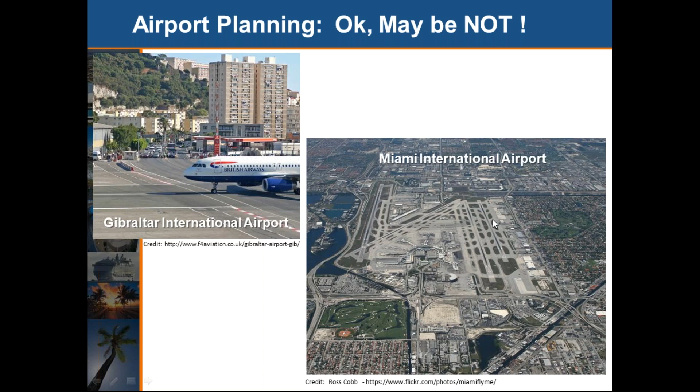So what's different about airport planning? Well, we have lots of extra regulations, including from the Federal Aviation Administration, FAA. You have lots of land use compatibility considerations that relate to noise and noise contours, that relate to airspace and making sure that the airspace is clear. All that can also get into high-rise stuff, also wildlife, particularly flying wildlife, and radio interference, that again can be high-rise and other types of interference, and ground safety issues.

And then now, increasingly, we're getting things like drones and having to worry about spaceports.

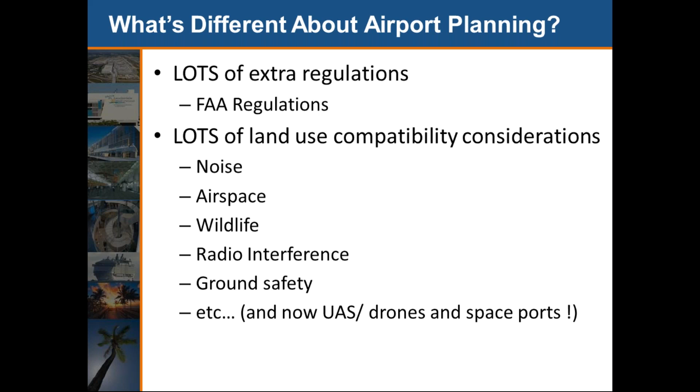In this state, we're having to worry a lot about presidential visits. We've got a General Aviation Airport, public aviation, that gets shut down totally every time the president comes to Mar-a-Lago. There are restrictions on how close airplanes can come to Mar-a-Lago when he's there, and that also affects some of the commercial aviation from Palm Beach International.

Useful resources, because they can help on the exam. There's a report on enhancing airport land use compatibility, a free resource that gets into a lot of compatibility issues. There's a PAS report I will place on the FDP site on airport and land use compatibility, and you can see some of the topics it covers.

How do you develop a strong airport vision? How do you envision potential futures through master planning? Enhancing airport land use compatibility seems to be more what comes up on the exam, along with other things you do environmentally. Airport community planners must work together, understand and consider the needs and concerns of the community, and make use of the airport.

The first big area deals with airport noise regulations. There are some regulations, and there's a PAS report out there from 1992, which you now have access to for free, so you can go look at that.

The Blue Book has about 12 pages of stuff on airport planning, and it covers things like airport land use interface, what is airside development, what is landside development. That sometimes comes up in the exam. We're going to talk about it a little bit, but the Blue Book has some good pages. So, common airport terms.

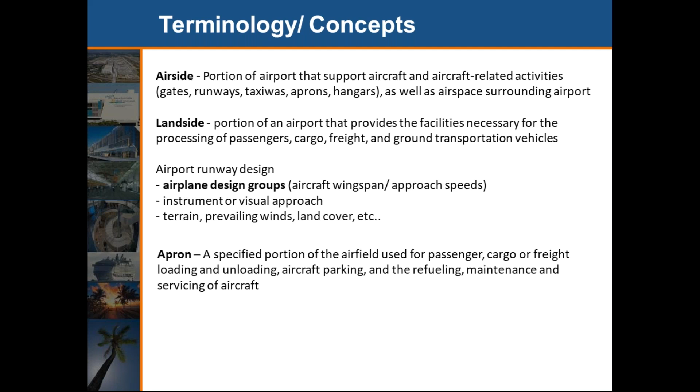Landside is the portion of an airport that provides the facilities necessary for processing of passengers, cargo, freight, and ground transportation vehicles. Apron is a specified portion of the airfield used for passenger, cargo, or freight loading and unloading, aircraft parking, and the refueling, maintenance, and servicing of aircraft.

Regulatory framework: first of all, there's a whole set of Federal Aviation Administration regulations, known as FAR - Federal Aviation Regulations, don't confuse it with floor-area ratio. There are ones that deal with the airspace, deal with noise compatibility, deal with certification of airports, and on and on.

Where do some of the funding sources come from? The obligations: the FAA Airport Improvement Program, money comes from the airport and the Airport Trust Fund, which is funded mainly from excise tax paid by users of the air system. There's an annual formula grant entitlement based upon number of plane passengers and cargo weights, and then there are discretionary funds to fund eligible capital improvement programs.

There are passenger facility charges - local user fees collected by the airport, and part of the airports. Then there's state grants and general airport revenue bonds, secured by airports' future revenue. These are common at large airports.

Passenger enplanements are collected for the full calendar year, and that determines the entitlements for the next fiscal year for the money. To give you some idea, for the current year, Miami had 19 million plane passengers, and Fort Lauderdale was about 11 million.

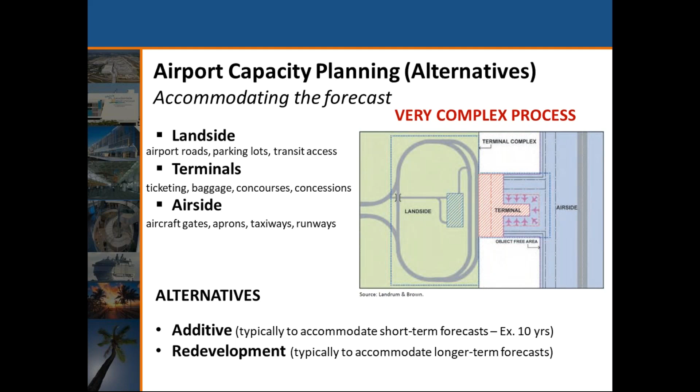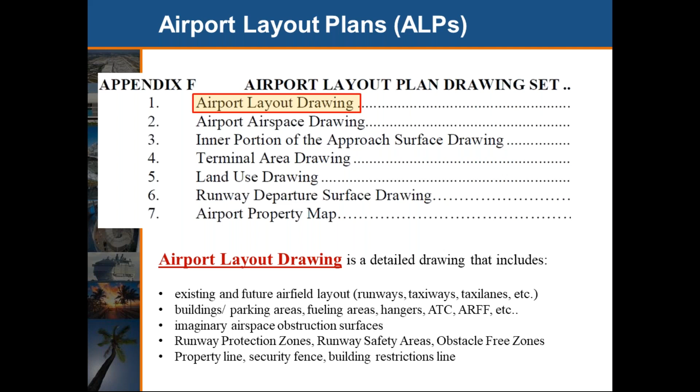So your layout plans are how you're physically going to put your detailed plan that shows your existing and future airfield layout, where your runways are, your taxiways, etc., and where your buildings are, what type of obstruction surfaces you might have to worry about, where are your protection zones, where are your runway safety areas, and your obstacle-free zones, etc. So you have all of that put on a plan.

Let's see. So, safe, efficient preservation of navigable airspace. You look at notification if anything's going to be a hazard to the airspace. Anything located on the airports, regardless of height, would be an issue. Anything that's going to be more than 200 feet above ground.

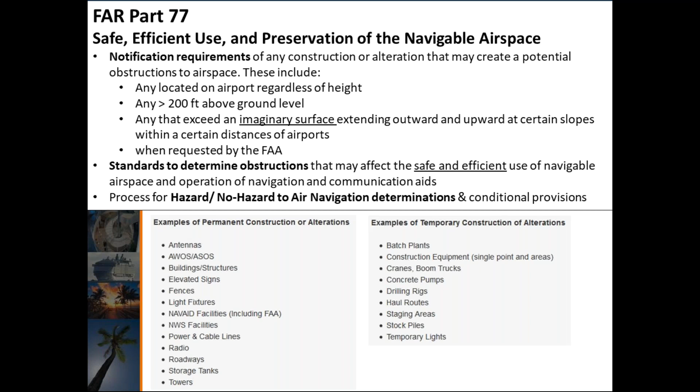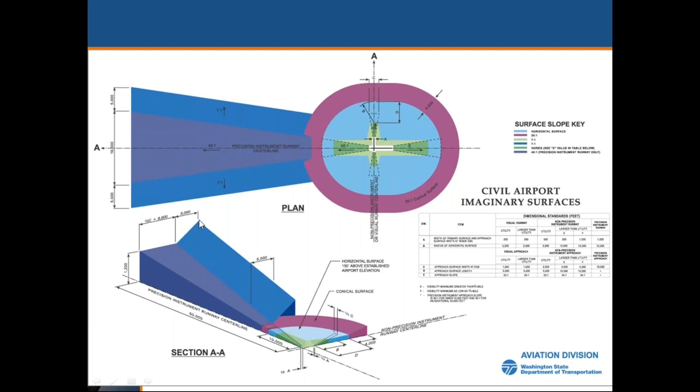Then you project out an imaginary surface extending outward and upward at a certain slope. Anything that's going to be within inside that envelope is an issue. And so you get into everything, fences and sometimes drilling rigs and all sorts of things. So that's what they look like. You can see where their envelope is going off down here out, and they're planning anything, look at whether anything's going to be involved in that area.

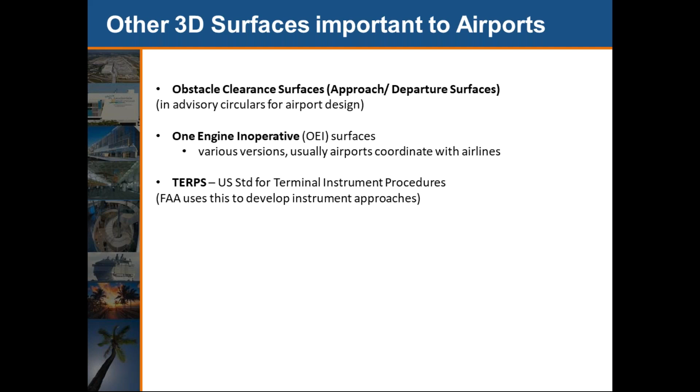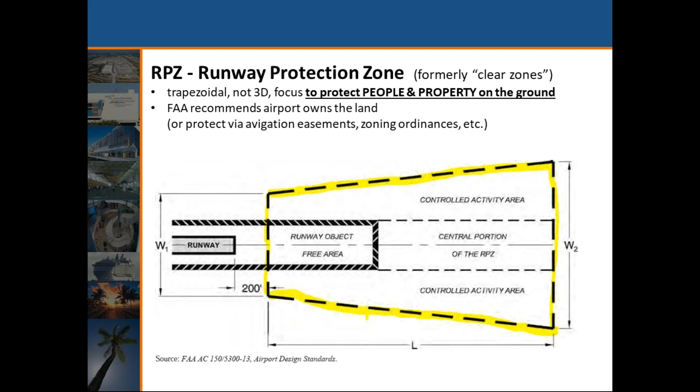So you're looking on a 3D level, trying to look at obstacle clearance areas and what happens if you get one engine inoperative, where it's going to have to emergency land, etc. Ground safety, because accidents happen. So you have your runway protection zone. It used to be called clear zones. These are, you're trying to protect people and property on the ground.

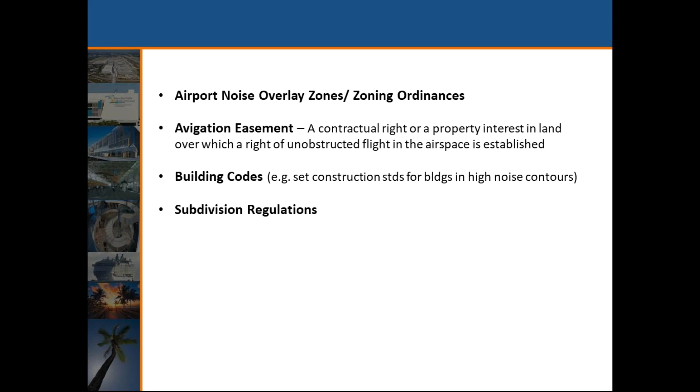All right, so trying to use planning tools, airport noise overlay zones. Avigation easement is a contractual right or a property interest in land over which a right of unobstructed flight is established. That's an avigation easement. And then you get into height and land use zoning, as we talked about.

Noise compatibility, okay, this sometimes has come up on the exam. Decibel is a scale from the threshold of human hearing, around 0 decibels, upwards towards the threshold of pain, which is about 120 to 140 decibels. Think about a loud rock concert.

Decibel A, the A-weighted decibel, is used for measuring environmental sound levels. Then you do different types of day-night noise levels over a 24-hour period, and they may have slightly different noise levels allowed. But between 10 p.m. and 7 a.m. at night, you're penalized 10 decibels, because there's higher human sensitivity at night to sleep disturbance. So you look at your day-night level contour, and basically what you're looking for is to define significant noise exposure as any area that's within a 65 decibel DNL contour.

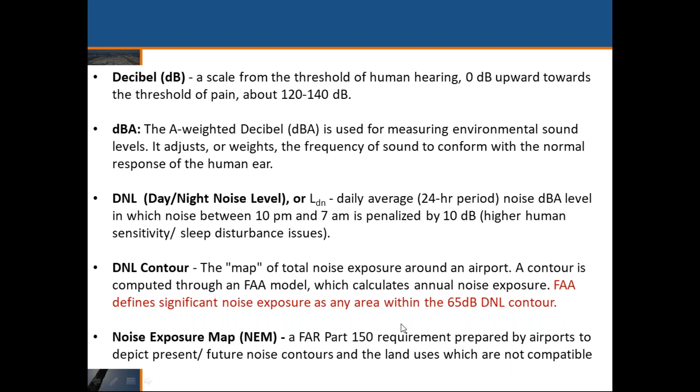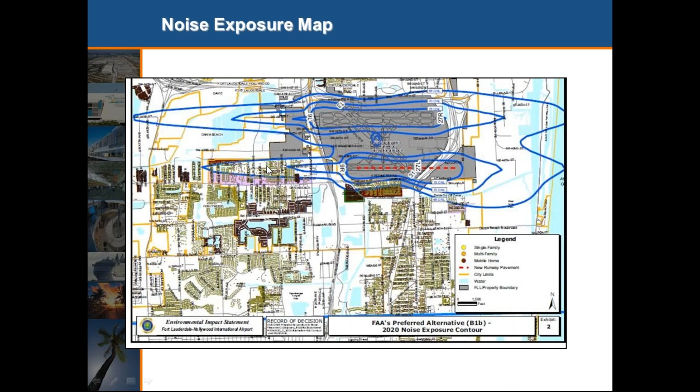That's the basic contour, remember that, 65 dB. And then so what you do is you draw them out. You see what's going to be affected and what type of land use is involved in there, and then you have to try to deal with mitigation of that. So for residential, things like that, you want basically below 65 dB. Certain other types of uses can withstand a little higher, like office, can go up to maybe 70. And some uses like mining or fishing may be able to go up even as high as over 85.

Basically, where the community determines that residential or school uses must be allowed inside the zone, measures to achieve outdoor-to-indoor noise level reductions of at least 25 dB or 30 dB should be incorporated into the building codes.

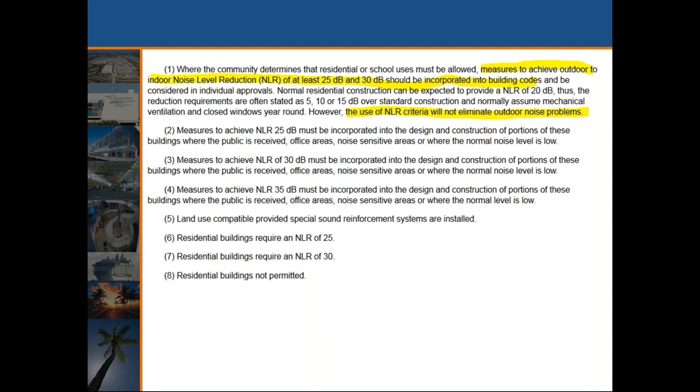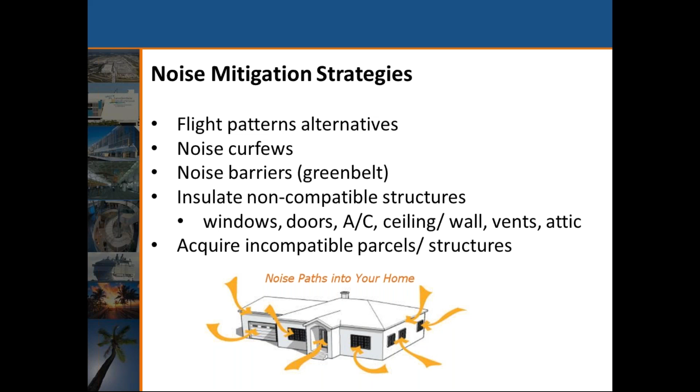Noise mitigation strategies: you may change flight patterns, which is what Trump wanted Palm Beach International to do because of where Mar-a-Lago is. You may get curfews limiting noise at certain times, restricting flights. You may use barriers like green belts, or insulate non-compatible structures' windows and doors. Or you may just outright buy them.

That's the first set on airport planning. I've got to get back to where I was here. All right, another one I want to show a little bit.

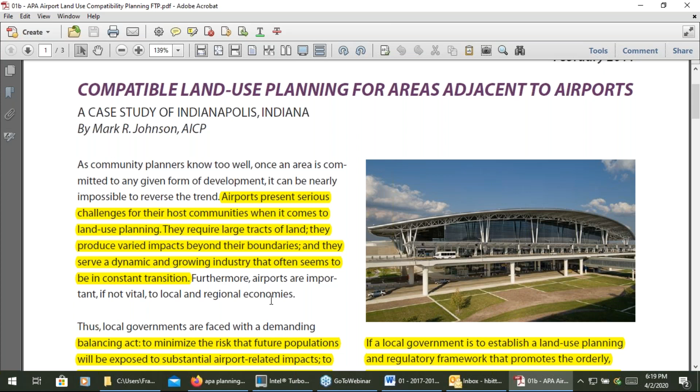There's a balancing act that governments must do to minimize the risk that future populations will be exposed to airport-related impacts, but you also have to protect the long-term viability of the airport by ensuring that existing development does not choke its long-term development needs, and ensure that urban development permitted in the airport area provides fair opportunities for property owners while producing lasting value to the community.

An especially difficult aspect of that interface relates to future airport facility requirements. Things like constructing a new runway or relocating an airport terminal can require substantial land acquisition, rerouting of major highways and arterial streets, and introducing airport noise to new parts of the community. But the inability to provide needed facilities, if you don't allow them, can seriously compromise the airport's ability to accommodate travel demand.

If a local government is to establish a land use plan and regulatory framework that promotes the orderly long-term development of the airport, it must have a long-term master plan that defines the broad outlines of the ultimate airport development. I think that's about all, just a few more points.

Four factors to be successful: you need a consistent management approach and consistent support of the airport authority's board of directors throughout the period when they're undertaking planning and any expansions.

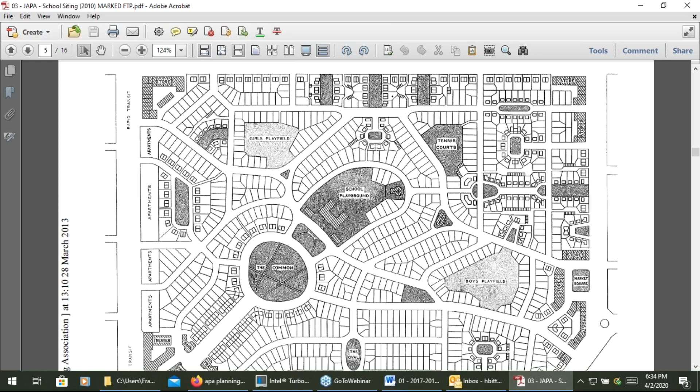Obviously, Clarence Perry's model of the neighborhood affects many other areas - we've come across it many times. Here it is: they have the school playground area in the middle, major arterial streets on the outside, more curvilinear streets on the side. Density is around 10 units per acre, about 160 acres, and we'll get into populations. That's just the schematic of a neighborhood unit.

Another thing I want to do is get into travel a little bit. This is for elementary schools - what's the walking distance? Typical walking distance, these are the ones I really want you to remember: about 1/2 mile for elementary school, about 3/4 mile for a middle school, and about 1 mile for a high school. They can go a little higher, some up to 2 miles. They also have walking and driving time and distance here, but these distances are more what I want you to remember.

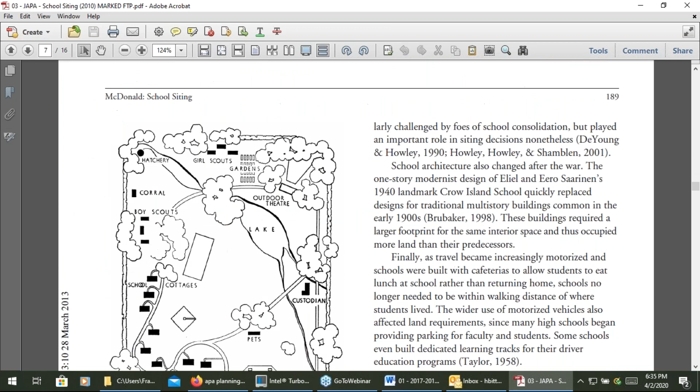That may be the majority of what I want you to pick up from this. But this is a whole discussion about school siting. Now, just to remind you about the neighborhood unit: designed by Perry to act as a framework for urban planners to design functional, self-contained, desirable neighborhoods in the early 20th century in industrializing cities. Perry's concept was that neighborhoods at the time were like islands locked amidst the burgeoning sea of vehicular travel - a dangerous obstacle which prevented children and adults from safely walking nearby. So he published this in the 1929 Regional Plan of New York and its Environs, which led to its promotion as a planning tool.

The principles were: here's that same basic picture again. Center the school in the neighborhood so the children's walk to school was only about 1/4 mile to no more than 1/2 mile, and could be achieved without crossing major arterial streets - so all the arterials are on the outside. It was big enough to support a school, between 5,000 and 9,000 residents. That issue has come up - how big a population do you need to support an elementary school? Probably between 5,000 and 9,000.

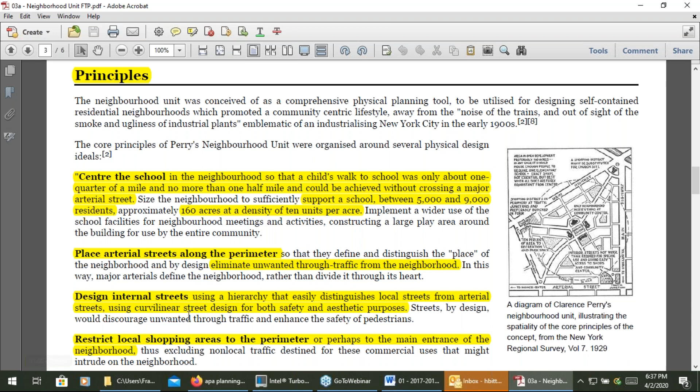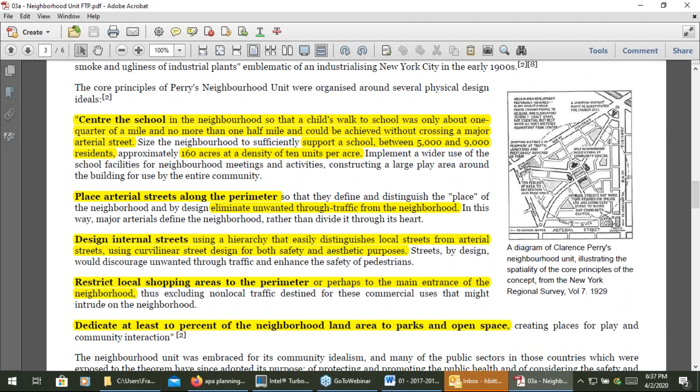160 acres has a density of 10 units per acre. Place arterial streets along the perimeter, the outside here. Eliminate unwanted through traffic by having curvilinear streets, smaller streets, things like that. Design internal streets using a hierarchy that easily distinguishes local streets from arterials, using curvilinear street design for both safety and aesthetics. Restrict shopping to the perimeter, out on the arterials, or perhaps the main entrance of the neighborhood, and dedicate at least 10% of neighborhood land to parks and open space - so some of these areas would be parks and open space here. That's the neighborhood unit concept.

I can almost guarantee you that some aspect of this neighborhood unit concept will come up on the exam. I'll just highlight this one also - again, he published it in the New York Regional Survey, Volume 7, 1929. That used to come up - I don't think it will anymore, but it's associated with Clarence Perry, and it's a connection to school planning. All right.

Next area we want to talk about a little bit.

Library planning. Remember some of the questions were things like the first step of library planning.

Well, just like in a lot of planning, conduct a self-assessment. Conduct a library planning self-assessment. Use results to begin planning the elements of the plan that need development or revision. And this goes through the rest of the steps. You can look through them so you know what the steps are, but they've been asking about the first one most of the time. Just to give you a couple other sources here.

What is a plan? You're going to look critically at what the library does now. By assessing the current situation, the obvious needs and direction can be identified. You have an assessment of the community needs, first responsibility to address the needs of the community. So you're going to do that. That's sort of your steps.

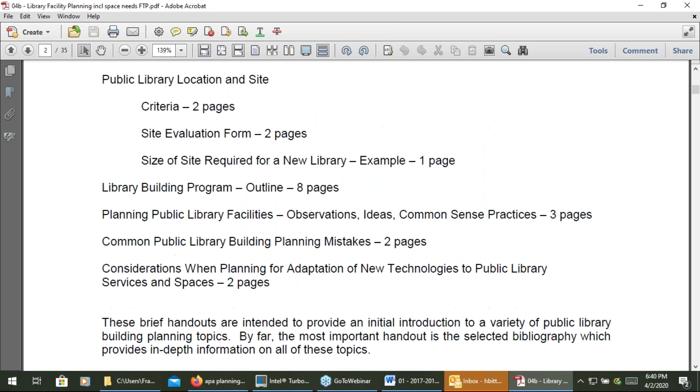Here's another source. Looks at, after he gets through all the references. Did I pass it? Yes, I passed it.

Sorry, skipped over. Basic steps in a library building project. It takes about 3 to 4 years to complete once the planning begins. So they do things like getting it initiated, getting a committee going, selecting a consulting librarian to deal with this. And by the way, typically they get a consulting librarian that knows about building new libraries or expanding it, because that's a form of art that more librarians know about than planners do. So within the library field, they actually have people specializing in new library construction, so they pull them in.

So one of the first things they do is complete the library space needs assessment. And then they go on to do other stuff. Sometimes it's getting their goals, but they look and do their assessment first. And it's just more discussion about how you go through that process.

All right. Told you about trip generation, it may come up on the exam for libraries, which most of you probably never looked at, except when I picked it up the other day. So for a library, per 1,000 square feet of space, it's a trip generation of about 56.24. Now, if they were to ask you here, what's the dependent variable and what's the independent variable, what answer would you have?

What would be what? What would be the independent variable? What's square feet? Square feet. Square footage would be the independent variable. So the dependent variable would be the number of trips per 1,000 square feet.

I don't know what the question is going to be exactly, but they've been asking something about that. And I did get one indication sort of that it may be tied to knowing what the dependent variable was in the rate. I don't know if they give you the numbers or they ask you to remember that it's about 56.

You can see it's lower than a daycare, but it's a lot higher than a lot of other uses per 1,000 square feet. For instance, let's see where we have, do we have office here? Yes, we have office down here. So for instance, it's higher than most office except for a governmental office building.

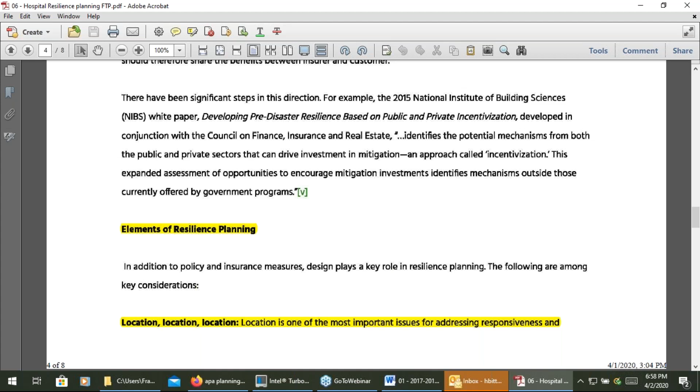In the built environment, resilience relates to how facilities are able to recover. The hospitals and clinics are an important part of the strength of communities. So how do we deal with this? The elements of resilience planning, and the thing they say is most important is location, location, location—one of the most important issues for addressing responsiveness and reliability.

For example, a hospital should be intelligently placed in a highly accessible area serviced by a broad range of transportation. They should be away from potential natural hazards that would leave them vulnerable to critical failure when they're needed most—such areas include swamps and flood zones. So stay out of the high hazard zones, not in the velocity zones along the coast, up high enough that you're out of the 100-year floodplain—maybe even in the 500-year floodplain.

So the first thing to do is not even locate them in places where they're going to be affected. Then you get into other issues about design of facilities—dealing with transportation going there, utilities, having backups, and all the other things. But the first thing is don't put them in harm's way, in an area that's had repeated hits or is likely to be impacted again.

Now, you can't conceive of everything, but you can plan for normal, typical natural disasters like sea level rise, hurricanes, flooding, and maybe even fire. You may not be able to plan for a tornado in terms of location, but you may be able to make it structurally sound enough to deal with that, have its own independent power supply, and other needed aspects. Okay.

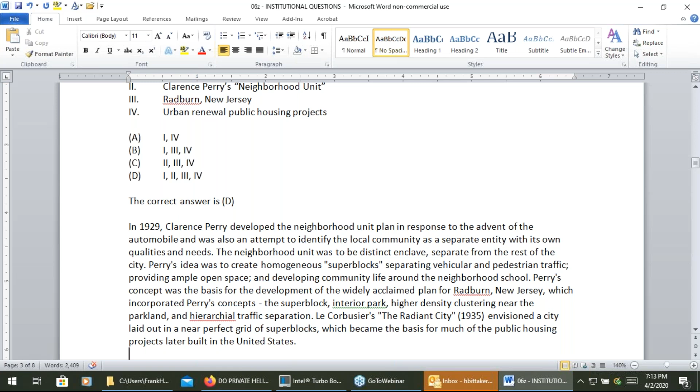Le Corbusier's The Radiant City envisioned the city laid out in a near perfect grid of superblocks, which became the basis for much of the public housing projects later built in the United States. Obviously, another one of my questions.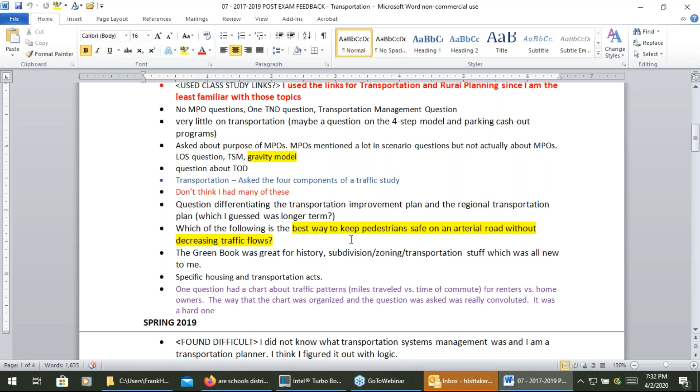Questions on the gravity model, purposes of MPOs, best way to keep pedestrians safe on an arterial road. Questions about high-speed rail access to report, parking cash-out programs, chicanes, woonerfs, who does air quality, who was involved with TOD, ICE-T — these are just some of the types of things, road functional classification. So look through all the list. I've just marked a few of them.

All right. Usually we have Peter Buchwald able to help — he's the TPO director up in St. Lucie, Transportation Planning Organization, which is an MPO organization type. But I've taken that and done a little bit of modification, a couple little places.

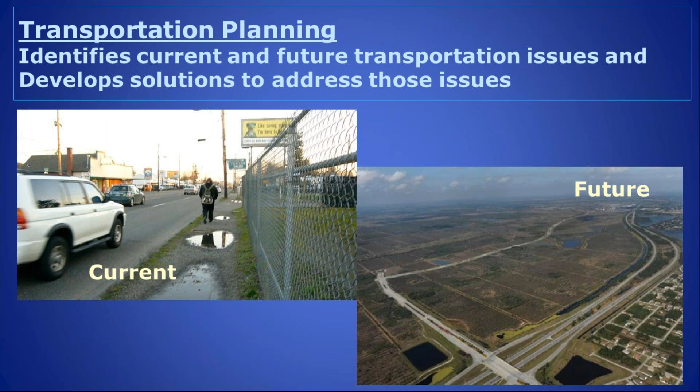So we're talking about transportation planning — it identifies current and future transportation issues, and develops solutions to address those issues. It looks at both current conditions and tries to do projections for the future. Where should we put new roads? What's going to happen? Where is the land use going to be? And then, of course, we can get into multimodal — different modes of travel.

You can see biking here, trolley car, walking, and cars — so you have four multimodal options right there alone. It's about moving people, raw materials, and goods to where they need to go most effectively, and considering all modes of travel. People need to move for living, working, learning, consuming, worshiping, playing, and raw goods need to move from their origin to an intermediate point to a final destination. So all of those things involve transportation planning.

Some of the inputs and tools: data and projections, using geographic information systems to help us model and figure out where things are going to go and how it's going to happen. Doing travel demand models — what area is producing trips, what area is attracting trips — and stakeholder and public input and comments, getting all of that involved.

So it happens at the federal level, the regional/state level, and the local level. At the federal level you've got the U.S. Department of Transportation, and under that umbrella you've got the Federal Highway Administration, Federal Transit Administration, Federal Railroad Administration, and Federal Aviation Administration, all coming into play in transportation. You have state departments of transportation, like the Florida Department of Transportation.

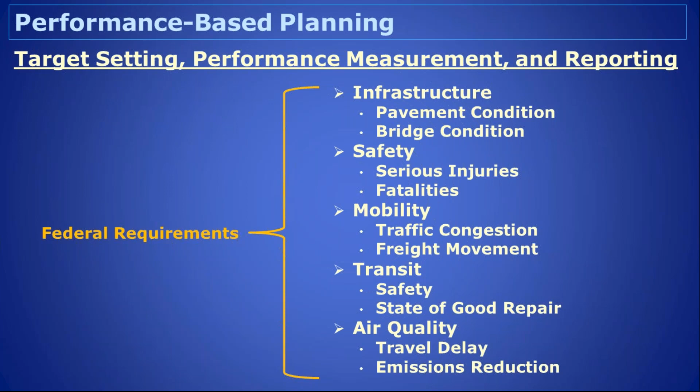That's performance-based planning. What MPOs do not do: they don't maintain the roads, they don't operate the roads, they don't construct the roads, they don't design the roads. That's more typically done by your state or local departments of transportation.

Level of service A: you're doing great. Free flow, low volumes, high speeds on the roadway.

Level of service B: stable flow, with operating speeds just beginning to be a little bit restricted by traffic. Drivers basically have a reasonable freedom to select their speed and lane of operation if they have multiple lanes.

Level of service C: mostly stable flow, but speeds and maneuverability are more closely constricted by the higher volumes.

Level of service D: approaching unstable flow, with tolerable operating speeds, but driving speed can be considerably affected by changes in operating conditions.

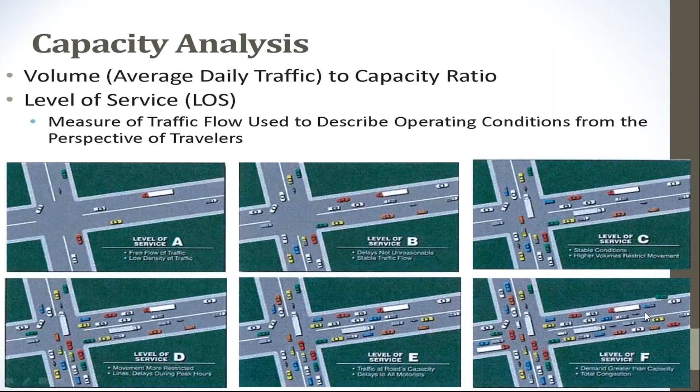Okay, and buses, how many per hour that goes. You start looking at — you have less than one bus per hour that comes by, that's like level of service F for the bus. If you have like 4 buses per hour, that's A or B level of service.

These are just generic. So, traffic impact analysis: understanding demands placed on the community's transportation network by development. The goal is to forecast additional traffic associated with new development based on accepted practices, and you try to determine the improvements that are necessary to accommodate that new development. And of course, this assists communities in land use decisions.

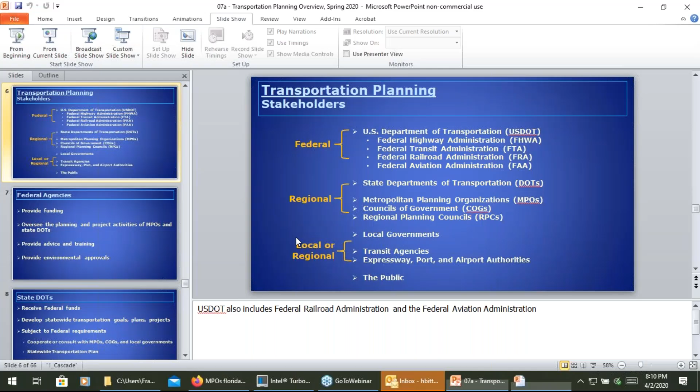Oh sure, there are some. Washington D.C.'s got one, it's a major one. When you get down coming in from the Beltway from the northwest, the idea is that you have some dedicated turn lanes and some through lanes, and supposedly it works. Yeah, all I'm telling you is it gets very confusing, and there is also resistance against it to some degree.

Okay. But yes, let me see if I've got...

But yes, maybe during the Q&A the gentleman might also have a comment on that. Well, yeah, he doesn't appear to be on right now.

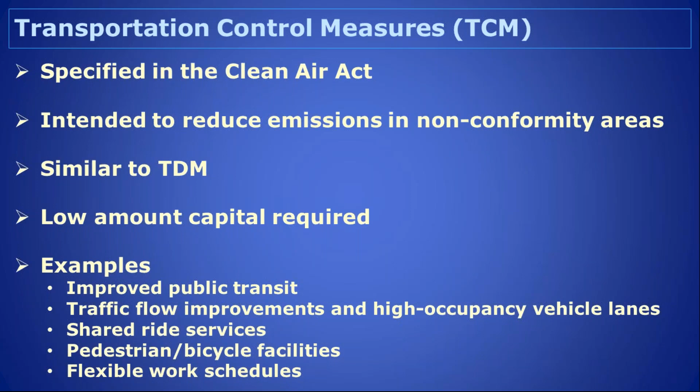Transportation system management requires more capital, but less than traditional roadway or new roadway building. You're trying to improve the operational efficiency of the system, and you're doing this by things like signal timing optimization, trackers and detectors that see when traffic is coming, so other traffic can merge onto interstates or freeways.

This may involve dealing with your turning lanes or pavement striping improvements, or having special strategies for special events, like a Panthers hockey game, or a Dolphins game.

I'm not sure about any other state, but here in California, insurance companies are charging per mile, based on how many miles we drive per day. They're charging us a premium based on how many miles we drive per month. That's how it works here with insurance.

There are different other strategies. You've also got parking cash out programs, where they'll give you money rather than a parking place if you use mass transit, ride sharing, or other modes to get to work. That's what in government, they give a subsidy for traveling by train instead of by car. Right, parking cash out program.

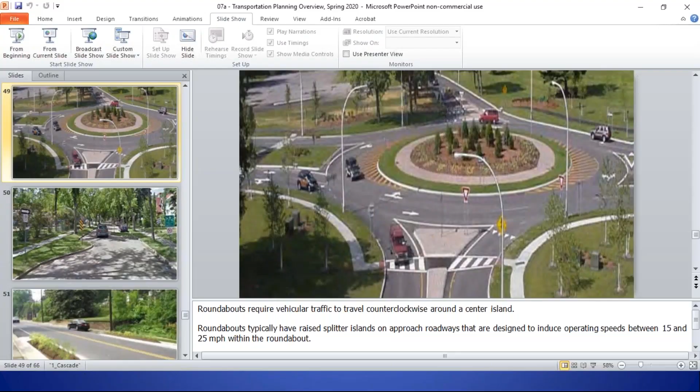I know that's a California program, and there's another one, I'm trying to think of the term. It's got pricing in it. It's not congestion pricing, but... I don't know if it's in here. Let me look again. Can you remember the name of it? Is it based on fuel consumption? No, it's based on how many miles you travel. It's got... the VMT? No, it's got another special transportation number, and I can't remember. It's not congestion pricing, not reimbursement. I can look at my insurance policy, it probably mentions that.

It's like a mileage-based user fee for transportation, vehicle miles traveled, but value pricing is another term. Mileage fee concept - these are all similar things, where basically they're realizing that cars are getting more efficient, the miles per gallon is going up, and so the gasoline tax collected for the same mileage is going down. So they're trying to come up with alternate ways to deal with that. It's mileage travel type pricing, vehicle miles traveled tax, VMT tax. It's a policy of charging motorists based on how many miles they traveled, proposed in various states, meant to replace or supplement the fuel tax because we're increasingly having fuel efficient vehicles. VMT fee works in Oregon, Illinois, and other places, but it's got another name too. If you remember it as VMT, mileage-based tax, or road user charge, these are all terms used for it. I don't know what they call it in California, but I know there's another term, and I just can't think of it.

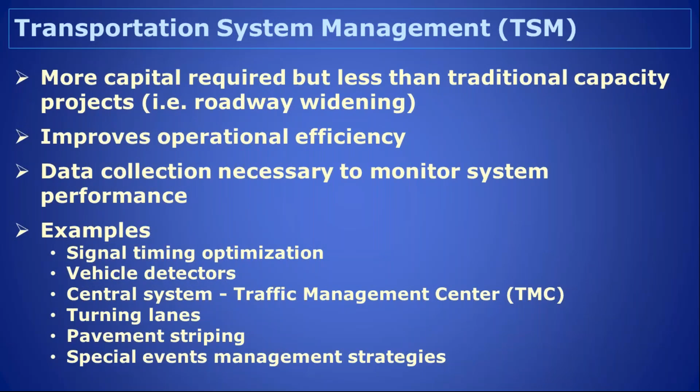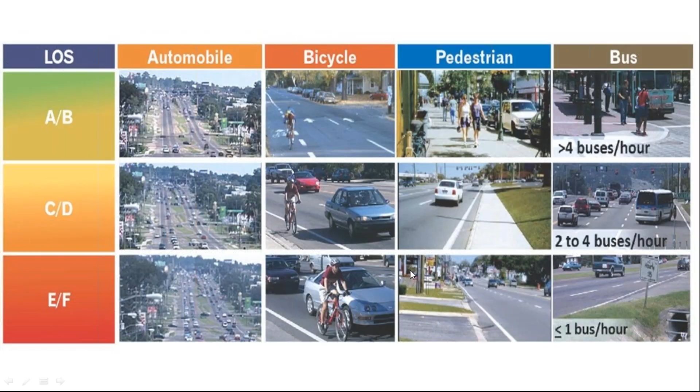That walk score - so one's more about segregation and one is more just access? This is more level of service. The other is a degree of walkability - how walkable is your area?

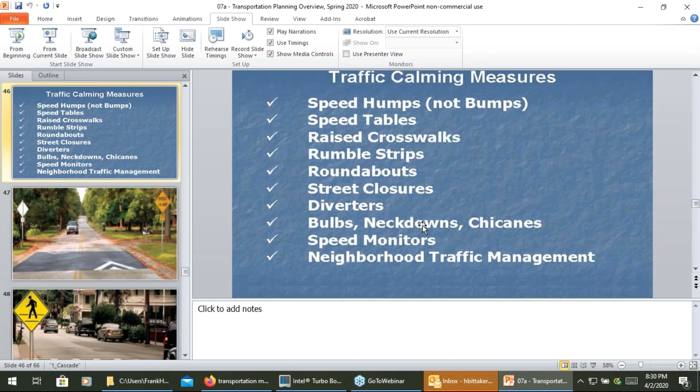Let me pull that up to show you. Walk score... let me go down. Walk score is based upon criteria like how close things such as grocery stores and schools are to you. Okay, so that's a score based on that. Let me do it this way - let's just go pull it up.

So it's access to amenities and resources - how close. You saw the chart for the 1,000 square feet one, remember? For library and everything - that's the chart you have. Basically, if you're less than a quarter mile to all of these...

So the scores work this way: if you're at the highest level, that's Walker's Paradise - you're real high. So it's basically about getting to things by foot, just pedestrian. Yeah, walk score is just about walking, right?

All right, thank you for that. Sorry, it was an easy one. Thank you, all right. I just didn't want to get... Okay.

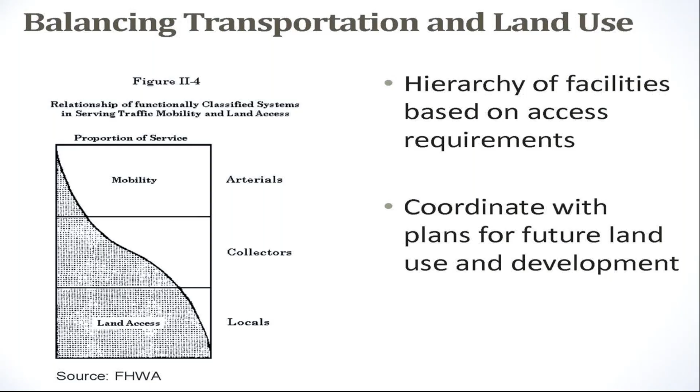So basically, if you're looking at how far away your house is from businesses, parks, theaters, schools, grocery stores, and things like that - as a common internet demonstration - if I'm less than a quarter mile, I get the maximum number of points. If I'm greater than a mile to walk to one of those, I get no points.

I live in a suburban residential area - I can walk along the street to walk my dogs and things like that. But if I want to go to a grocery store or any store that sells food, I'm further than a mile away. If I want to go to a school, with the exception of the elementary school, I'm further than a mile away. If I want to go to a theater, I'm further than a mile away.

So I'm much more car dependent because I'd have a much lower score, closer to 0 than 100. If I were living in a more downtown type of area with restaurants, little grocery stores, and commercial areas, I'd have a much higher walk score because it's much easier to walk to those things. That's different from the level of service, which was focused a lot more on how safe the walking area was.

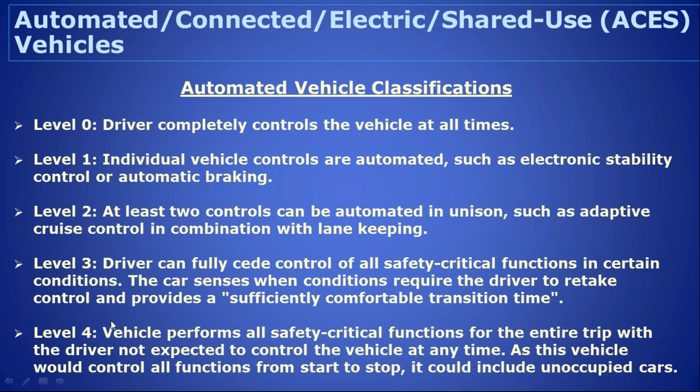Level 2 is where at least 2 controls can be automated, such as adaptive cruise control in addition to lane keeping. So these are different degrees of automobile automation - autonomous vehicles and connected vehicles. You see here where they're wireless controlled.

They're getting signals. These are things we're going to increasingly have to work with and plan for in the future. And of course, we're getting electrical vehicles and shared use vehicles, so we're going to need to start putting in more power stations. Like out at Wellington, they have one parking space reserved just for electric vehicles so they can power up, and they do it free.

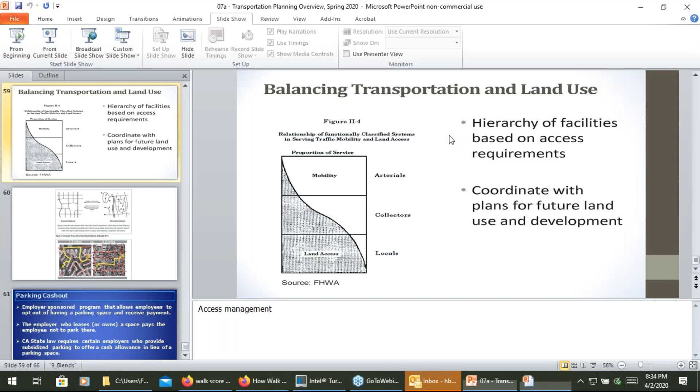And that's basically it for the main transportation planning presentation I want to do. After that, I'm going to go into some transportation practice questions. Any other questions right now?

If you want a little more insight on this, since the TPO director isn't here, you could go back and listen to when he gave this presentation in the fall. You might get a few more insights in other areas. I tend to focus on what we know comes up on the exam.

Some things, like this question, we've seen in the past but it hasn't come up recently. Which degree of angle do parallel parking spaces typically have?

D for David, maybe. Anybody else? I think it's A, zero, but I don't know why those are percentages — those should just be degree symbols. Oh, they're right, they should be. I don't know why he didn't. This isn't one of my questions, kind of throws you off a little. Maybe because he couldn't do a degree symbol. Should be zero degrees. I didn't even look at that — I just pulled it from Mike, and for whatever reason it either had it or it didn't come over. Could be when I copied it over it went from a degree symbol to a percentage symbol. That could be what happened, and I didn't pick up on it.

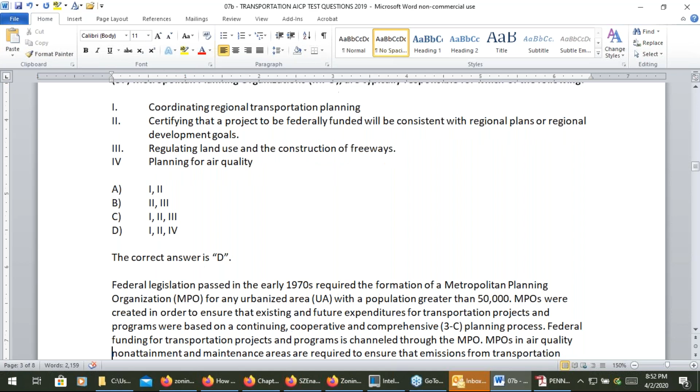MPOs are typically responsible for which of the following? The answer is D, 1, 2, and 4. Not typically responsible for regulating land use or construction of freeways. So they would coordinate regional transportation planning, certify that projects to be federally funded are consistent with regional plans, and plan for air quality. I wrote this one particularly to include air quality, because people were having problems with that question and missing it.

Federal legislation passed in the early 1970s required the formation... let's see, just let me see if I've got it up. Oh, I don't have it up still. Let me see if I can bring it up.

So I had a question about who does air quality monitoring, about MPO responsibility for air quality. An easy MPO question if you want, who's responsible for monitoring air quality, and of course they also had roadway classification, the functional classification system, an MPO air quality question, and MPOs work on air quality. Make sure non-MPO folks have it ingrained in their heads that MPOs work on air quality compliance.

So federal legislation passed in the 1970s required the formation of MPOs for any urbanized area with a population greater than 50,000. MPOs were created to ensure that existing and future transportation expenditure programs were based on a continuing, cooperative, and comprehensive 3C planning process. Federal funding for transportation projects and programs is channeled through the MPO. MPOs in air quality non-attainment and maintenance areas are required to ensure that emissions from transportation investments will not cause new violations or affect an area's schedule to attain air quality standards. The Clean Air Act identifies the actions states and MPOs must take to reduce emissions from on-road mobile sources in non-attainment and maintenance areas.